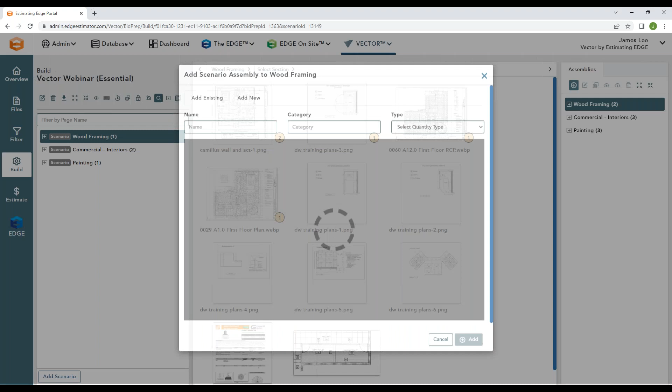Let's take a look at that. I'll focus on the assemblies tab on the right-hand side, starting with my wood framing scenario at the top. I hit this add button, and we get a pop-up modal with a section titled Available Assemblies—that's our database. If I scroll down, I see tons of different assemblies: interior partitions, metal panel rain screens, a 2x4 acoustical, some generic area, length, and count items.

What we recommend, and will definitely help you do, is build some subcategories of your database. For example, if I want to easily find my wood framing conditions, there's my wood framing category. I can bring in that whole group by hitting add—that's exactly what I did, bringing in a wood stud framed interior wall and a wood stud framed interior ceiling that we'll do some takeoff for. Now for my commercial interiors, I'd do the same thing.

I'd search up my drywall category—here's a bunch of different partitions I've built out over time. I can bring in what I need, then find my ceilings category, bring in my 2x4, and look at all these door assemblies I've built over time as well. Just an example of what you'd see, and it's super easy to search and find what you need.

You can also filter if you're looking specifically for an area, length, or count, and filter by type as well. Then I'd hit add—and that's what I've done here. I've got a 2x4 acoustical ceiling, a 30x80 door, and a B01 partition with a 12-foot ceiling height. I also brought in some paint surfaces—an assembly for painting a wall, a ceiling, and a floor that we'll look at the items for later. Really easy to access that database.

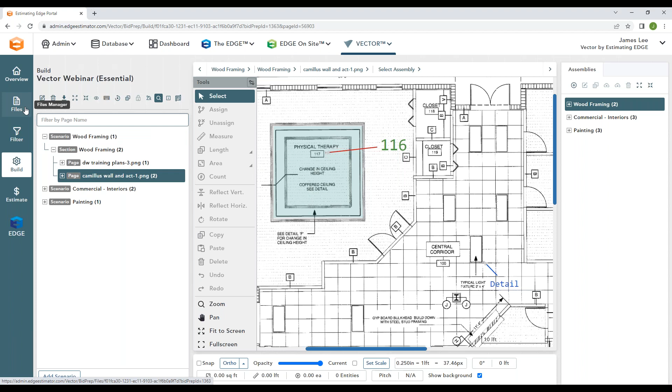And so we've got the background image that was previewed in the file manager for this uploaded plan. Really quickly, I want to touch on some annotations that I created earlier showing up on our takeoff screen. Whatever you annotate for an image in the file manager shows up on our takeoff screen, so you can use it for reference.

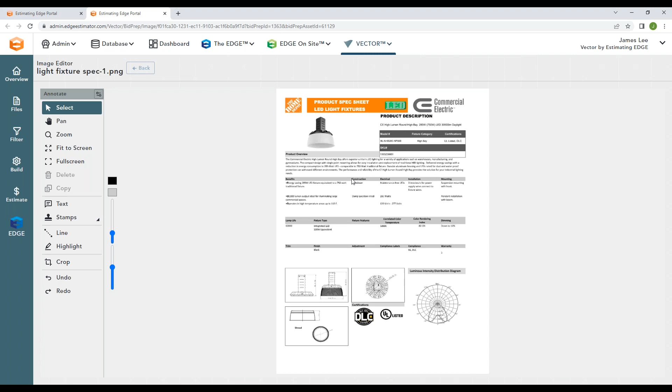We've got an arrow with a text box letting us know maybe this room number is different. But what's even cooler is I have a text box with another spec drawing linked to it. So if I hold Control and click on that detail text box, it actually opens up another image and its image editor in a separate window, so I can reference this as I'm doing my takeoff.

You can also link a web page to this text box as well, like a link to a supplier's spec website or something like that.

All right, and then we would just need to set the scale. That's pretty standard. You hit this set scale button. We've got a list of known scales here, which probably would cover you for most of the scales you see on a daily basis. If not, you can type a custom ratio right here using these fields.

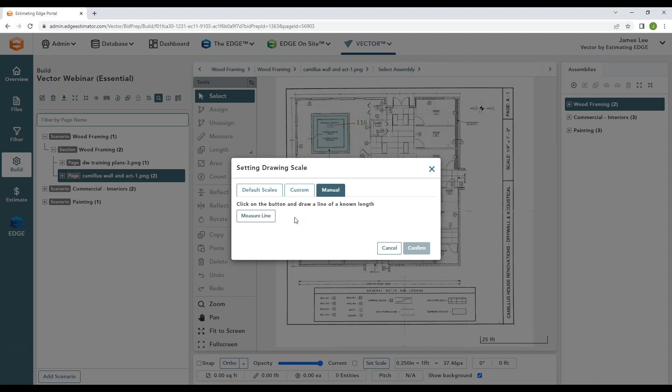I would say the most common option though, if you don't trust what's on the architect's plan, and we all know that happens, is I hit this measure line button and find a known dimension like this one here. I just left click on each end of that to draw a line segment, and I see that it's 34 feet. So I type that here, 34 linear feet. I hit confirm, and you can see that the scale is right about a 1/4 inch scale. So in this case, the architect did a fine job with that.

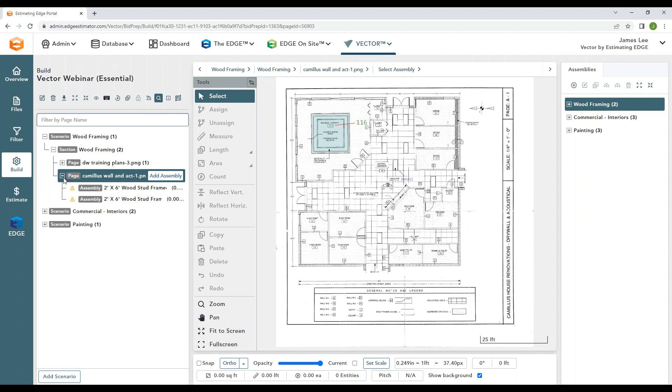And now we're ready to go. Okay, we've got our scale set. I've got my wood stud framed ceiling and wood stud framed interior wall. We're gonna start doing some takeoff for those, okay? So let's start with our ceiling.

And because our ceiling is an area assembly, the toolbar knows that, and it gives my area tools a highlight for me. Those are gonna be our rectangle tool, polygon, some deduct options, and then we can draw circles and arcs as well. So whatever the shape is, we got you covered.

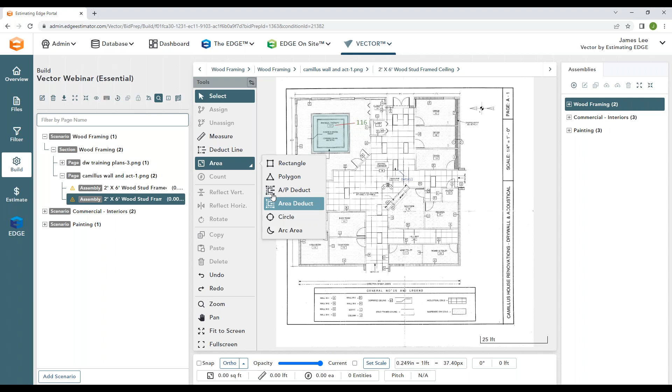We're gonna start with a polygon and we're gonna draw the area around this physical therapy room here. And we're gonna use a cool tool called ortho. I can specify an angle and that will only allow me to draw at that angle. So you see here, I have it at a 0-degree angle. It's just going to ensure that my lines are straight.

So then I just start dragging my mouse and left clicking, and you can see how speedy and efficient this is. No need to wait for rendering. I hit enter on my keyboard and boom, it's done. You'll really feel the smoothness that this web platform offers to your takeoff, right?

And now let's say I want to switch to a different assembly, boom, no problem. You know, I love this web platform for takeoff, I really do.

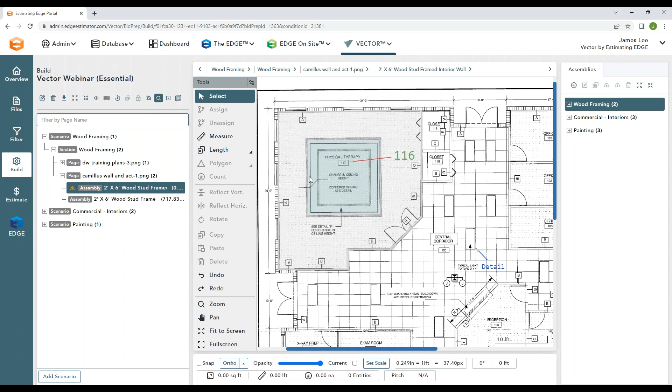Now let's say I want to go ahead and trace the perimeter here of this area shape to account for the linear feet of wall surrounding this room. Okay, because this is an interior wall assembly that I've set up as a length, that highlights my length tools. I've got a line segment, a negative quantity deduct line, a poly line, and then an arc. We're just gonna do our poly line today.

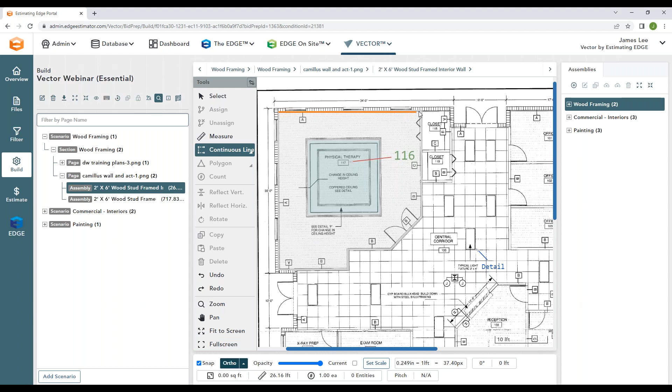We'll keep ortho on, and we have another tool called snap. Now what that's gonna do is watch how it snaps me to my previously drawn point right here. It locks me right into place as I'm drawing and just really prevents me from making any errors. I can just trace around my area shape and look at how easy it is to go ahead and complete that.

All right, so now we've just done some length, we've done some area. Let's even kick it up a notch. We'll come back to our area and let's do a bit of a deduct to take care of this.

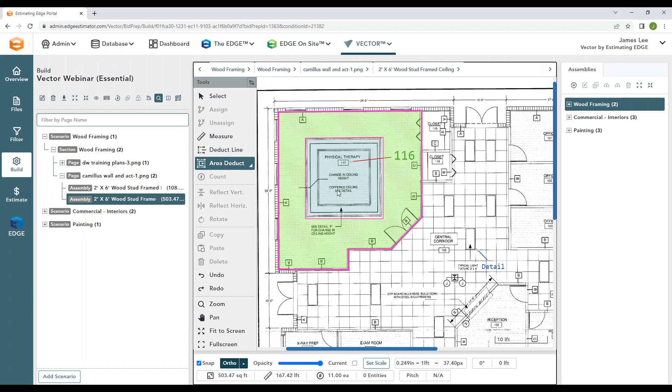This looks like it would be a coffered ceiling typically, but we're just going to take it off as if it were almost a skylight. I just draw my shape as normal, and take a look at the quantity changing on the left-hand side — we're actually removing quantity from this assembly, as a deduct should. We bleed through to our background image so you can see what's underneath. So we've got the tools to keep you covered for a deduct as well, no problem.

Now we'll switch to a different blueprint. You can see how quick and easy that is. And we'll take off this radius partition. Oh no, what do we do?

Right, no problem. We grab our continuous line tool — I'm going to leave ortho and snap off for this one — and just start drawing as we've been doing. And here's that orange color, by the way, that I told you to keep in mind. Now to handle this arc, what I want to do is place one point at one end of the radius, another in the middle of the curvature, and a final point at the other end of the radius. Then I simply hit Control K on my keyboard, and that translates that shape to an arc for me. Then I just double click to end my shape. So a simple keyboard shortcut takes care of that for you. No need to worry.

So we've seen a little bit of area and length — we'll get to how you can count up eaches later. But now I want to kick it up even more and ask, what can we do with existing shapes? How can we manipulate them to speed up our takeoff even more, right?

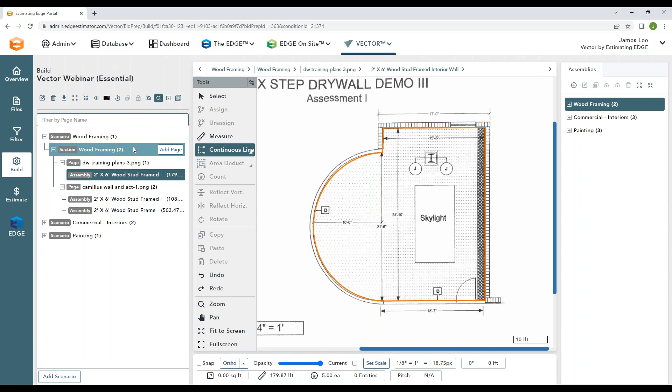Let's jump into the commercial side of things and look at a somewhat more comprehensive floor and ceiling plan that you typically see for a larger job. Here's a ceiling plan, and we're going to do some takeoff for our 2x4 acoustical ceiling. Let's say we wanted to populate these rooms along the right-hand side. There are some small differences between each room with this right angle section, but we're just going to keep it simple and take these all off as a rectangular area.

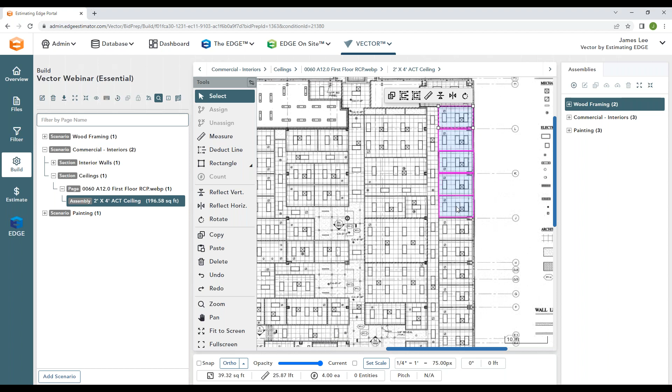Our rectangle tool is really awesome — you just left click, hold and drag, and boom, it's done. I could do that for every room, but we have an even quicker way. I select my existing shape and hit our duplicate tool, then I can just run down my list, duplicating this shape for all of these rooms. This would also be great if you do any wall panel takeoff and want to take off the same panel type down the side of a building. There we go — I just hit escape to finish, a much easier way than having to manually draw anything. We're just trying to think of you for when these situations arise.

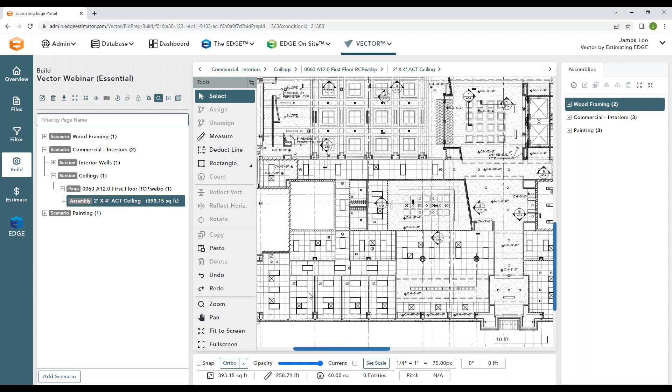Another example: if we focus on a different part of the plan, we've got some rooms down here, and let's go ahead and not do these as a rectangle. We'll take these off true to form as a room with this right angle, and there we go. We can see that the room next to it, and even the rooms next to that one, are really the same shape, but just mirrored over the vertical axis horizontally.

So we know we can duplicate a shape, right? I'm going to place it in the room. Instead of having to draw the shape from scratch, I can just mirror it — and there I go, I make a minor adjustment and boom, I've now got my takeoff done for that room as well. I could just go down the line and continue to do that: add this shape to the room, mirror it, and I'm good to go. So you can see our mirroring tool can also be very useful, and you can also mirror over the horizontal axis as well.

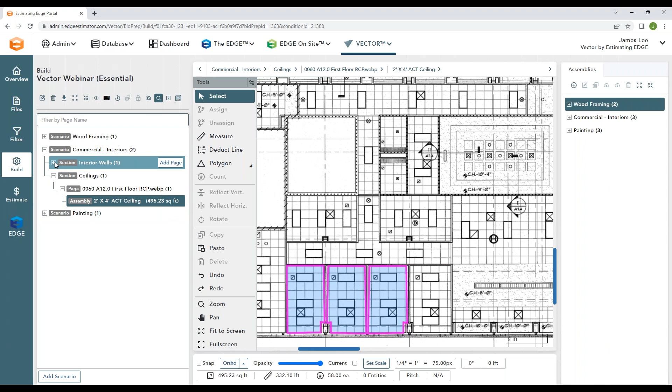Lastly, let's jump to our floor plan and do some takeoff for an interior partition, this B01. Let's say we want to take off this pantry room down here. We'll do it the same way we've been doing it.

I'll grab my continuous line tool and start left clicking around the perimeter of the room, and keep it simple. Now let's say an addendum comes in, and you need to take this same pantry room and build another one right here where my mouse is, next to this special education director room. We know we can grab this shape and duplicate it and place it there.

But maybe this isn't the desired degree of rotation I'd like for this room. No problem. Just like I can mirror and duplicate, I can also hit rotate and move my mouse clockwise to rotate it, then drag it into place. I didn't do it perfectly straight, but you get the idea. Our rotate tool lets you keep the integrity of your takeoff shape and just rotate it. Sometimes the plan itself may even rotate 5 degrees, and you can just rotate your shape in accordance with that as well.

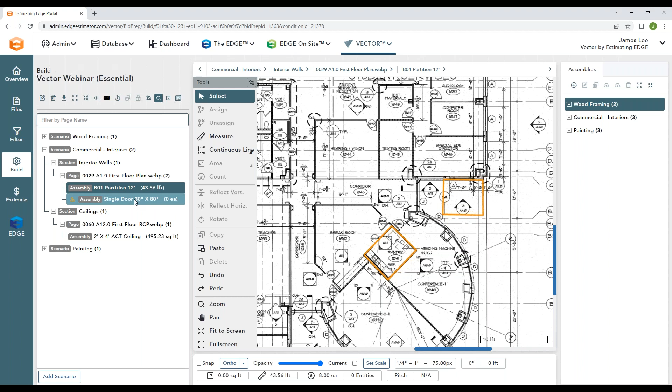Now, the only other type of takeoff we haven't seen is counting up our eaches. So if we want to take off all of these doors, I grab my door assembly, hit my count tool, and start left clicking on the plan wherever those doors exist. You see the count icon here, and that's it. We have all different types of icons, colors, and icon sizes you can choose from. I just kept it simple here today.

But as you can see, this web takeoff is really easy to use. It's quick, it's efficient, and that's what I want you to take away from this today - that we have all the tools you need for whatever your job has to offer.

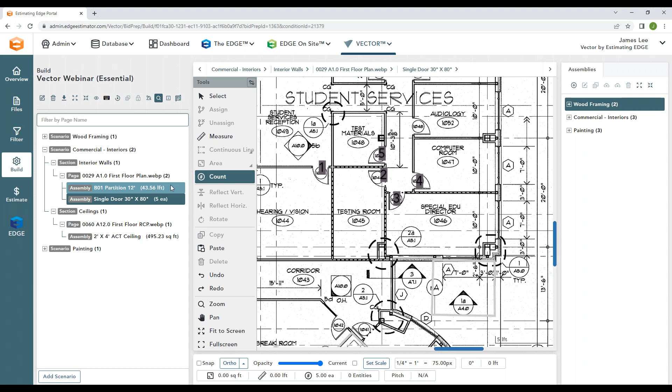Now that we've aggregated takeoff quantity for all our assemblies, and looked at the items a little bit, let's take a deeper look at them, their quantities, and how we can price those out to finish up our estimate. So again, takeoff and estimating all in one - we just click our estimate screen on the left-hand side and away we go.

Now at the top we've got 3 tabs for each of our individual scenarios, and they each have their own contract amount, as I mentioned earlier. Let's take a look at what we see in each scenario.

Here's our wood framing, and we've got everything we need for an interior wood framed wall for a residential home or anywhere. We've got our 2x6 studs and track, 4x8 drywall, all our finishing tape, mud and screws, some framing nails. If we go to the commercial side of things, we've got all our metal stud, our labor to frame it, some frame ceiling labor for our acoustical, our door, some perforated tape, our more commercial materials.

And even in painting, I had some pre-populated takeoff for the labor and material of latex primer, 2 coats of latex flat, and then an epoxy water-based 2 coats as well. And these are built out the same way.

I can even check out how they're built right from the estimate screen. All we're saying is 2 square foot of this latex flat for every 1 square foot that I take off, and the reason this is 2 is because we specified we want 2 coats of this right here. So whatever your job calls for, you just build it into this formula and you're good to go. We see that it's ordered by the gallon here, 200 square feet a gallon - another great example.

Okay, so I just wanted us to see that you can have multiple different trades all in the same database, easily accessible.

We're going to spend our time estimating here in the commercial interior section though. And so we see a bunch of different materials and laborers. I'm going to click where it says cost type just to filter a bit and get everything grouped.

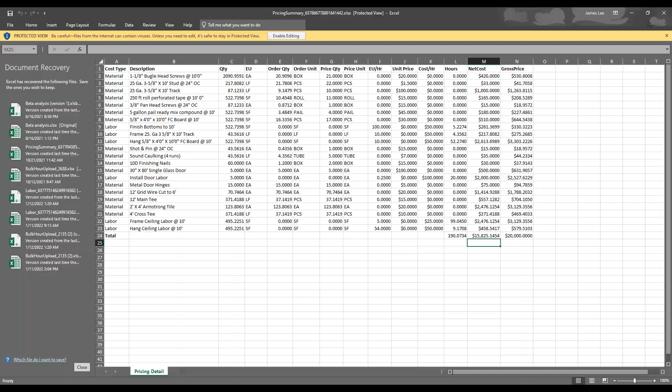You can obviously adjust this spreadsheet because it's in Excel. Our recap report is basically going to take that expanded recap view we saw and just give it to you in a spreadsheet format here. Here's our material and labor costs, here's our markups at the bottom. If there was any material and labor markups, you would see those here.

So we've got some other reports as well. We have a current screen report. What's cool about that is if you were to change up any of these columns here, turn some of these items off or filter to just labors, our current screen report will respect whatever your estimate screen looks like once you export it. So that's another great report too.

But at this point, we are pretty much done, right? We loaded up our job, we did our takeoff in a bunch of different fashions, we jumped to the estimate screen where all our material and labors were waiting for us, and we did a really easy way to price everything out, and now we're done. So once you get comfortable with this application, you'll be flying through. I hope you saw its flexibility and how easy it was to use, while at the same time giving you all the comprehensiveness you'd probably need. We've really made it through the entire workflow at this point.

So what I would like to do is open it up to any questions from the audience who's watching today.

Yes, great job, James. We do have a couple of questions. The first one is, can we create new assemblies from inside a job?

That's a great question. We talked a lot about the ability to create a database when you first buy the product, and we saw a little peek at it when adding assemblies to our scenario. But what do I do if I don't know I need a new assembly until I'm working on a job? A new wall type or ceiling type shows up on the blueprint that you've never seen before, so you need to put it into your database.

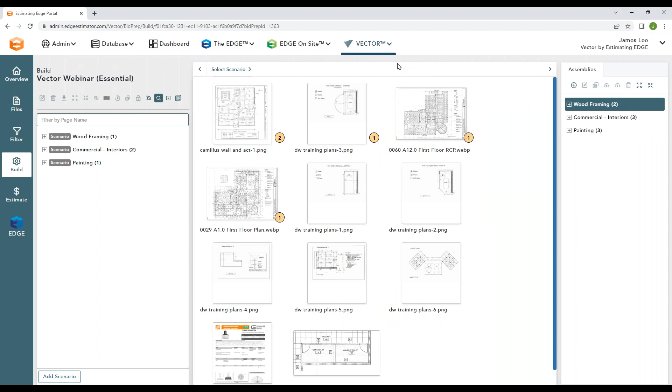But we actually do have a database location. If you hit this vector dropdown, we've got a screen called Assembly Manager, and what you're seeing is a list of all the assemblies I have in my database - painting, eaves, flooring, wood framing, all in the same place. I can click on one, like my 14 B01 partition, and open up the same assembly properties we saw at the job level, except now they're in the database, so this will change it globally. It won't change anything in a job unless you refresh it inside the job.

And then we've got all our items on the right-hand side. You can open these items and change the formulas, delete them, copy them. So this is where you would be building your database when you initially purchase, and this is where you would come anytime you want to add to it outside of a job. So I believe that should answer that question as well, Bob.